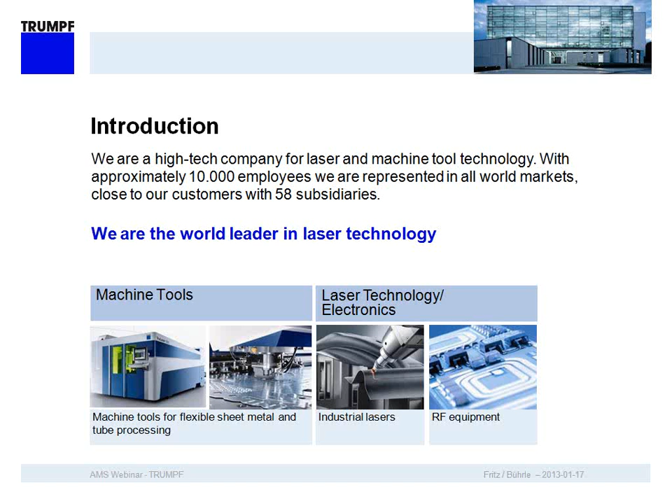In terms of diode laser power, we are the biggest producer, and we are the only company with this high product portfolio with, for example, micro lasers, pulsed lasers, marking lasers, high power lasers, low power lasers, and so on. Also we are the only manufacturer, which will be seen in the presentation, for 3D cutting machines, and we are the only manufacturer doing the same machine and laser source at the same time. We also have some other business fields which is not on that slide, such as medicine technology and hand tools, but we just focused here on our main activities.

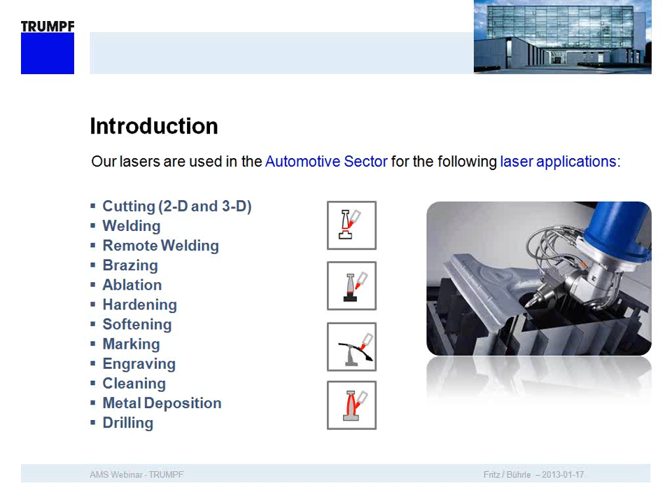Going to the automotive sector, which will touch our hot forming topic today, we have different laser applications. I would like to outline the majority of these applications our customers are using. Our lasers mainly for cutting, 2D, 3D, welding, remote welding, laser brazing, which is a very common application, ablation, which we will talk about today in this presentation, laser hardening, softening, marking and engraving, cleaning of edges, metal depositioning, and of course drilling in injectors and so on.

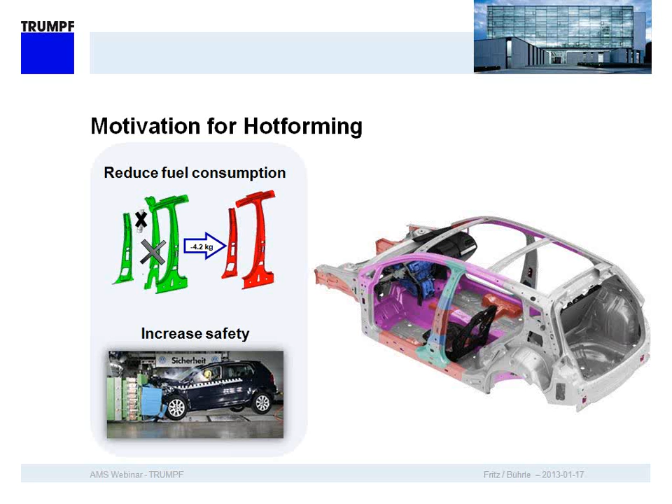So going to the hot forming topic, what is the main motivation of our customers, of the OEMs, to use hot forming parts? I think I don't have to introduce and explain hot forming, but the main motivations for it are to reduce weight, and that means reduce fuel consumption in the cars. The second motivation, of course, is to increase the safety of the passengers in the cars. On the right-hand side, we see a state-of-the-art car model, and in color we can see hot forming parts used in a body-in-white frame. Their customers use around 20 to 30% of their car body using already hot form parts. So it's really a mega trend, and state-of-the-art cars are increasingly using this kind of parts in their models.

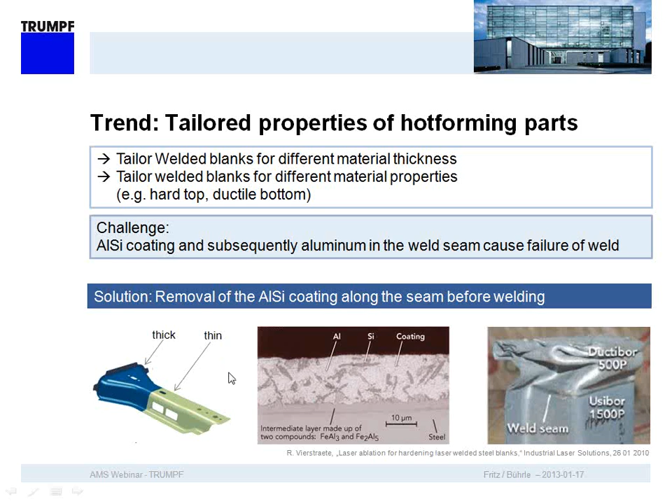So the process requirements we got from our customers is to remove 10 to 20 or even 30 micron of this aluminum silicium coating, and only along the welding edge of the blank. That means you cannot remove too much because of corrosion issues, and also the process must be very stable, so it must be adjustable to take off the thickness at different heights.

They don't want to change the property of the base material - that means we cannot bring heat into the material. The removable width is typically 1 to 2 millimeters, depending on the welding seam thickness, the laser source, and the thickness of the material they weld. Typically it's 1 to 2 millimeters at the edge.

Also a requirement could be the simultaneous removal on two sides of the blank - that means you have to take off the layer on the upper side and then the bottom side, just to make sure that no aluminum goes into the welding seam. A typical welding speed in tailored welded blank machines is around 6 to 8 meters per minute, so the resulting linear removal speed should be around 12 meters - since we have to take off both the top and bottom side - overall 12 meters, to not create a bottleneck in the process.

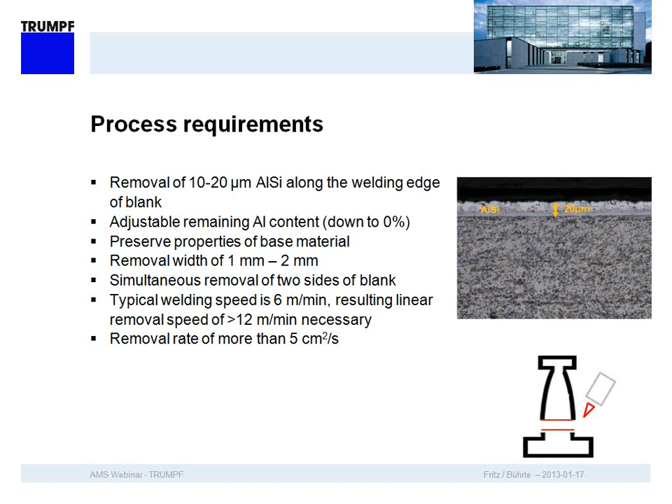So what we did, we used different setups. We made many tests in our laboratory here, and we wanted to understand this process to be able to transmit it to our customers and make a good technical and industrial application out of it. So we started from scratch with a typical round fiber, and also a square fiber, a rectangular fiber, and we created with our optical setup in our head a line focus. We really tried many parameters, but basically we used these 4 different optical setups.

So on the left hand side we see just symbolically the fibers, and on the right hand side we see an ablation spot. For example, to get a straight line going in that direction, we really have to make a lot of overlapping pulses to remove the layer, and the same we do here - we really played with these different overlappings of the layers.

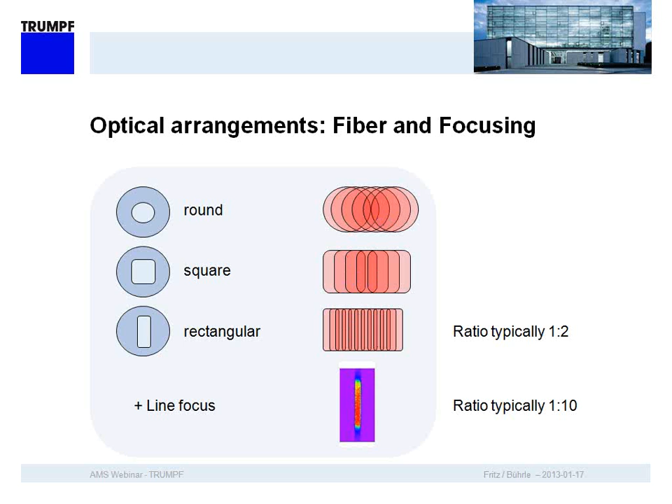For the laser source, we used our nanosecond laser from the TruMicro series, which is a very high productive laser source with high laser quality. That means we can use small fiber with small diameters, which helps us in terms of optical arrangement in the optic, so we could really play in different optical arrangements.

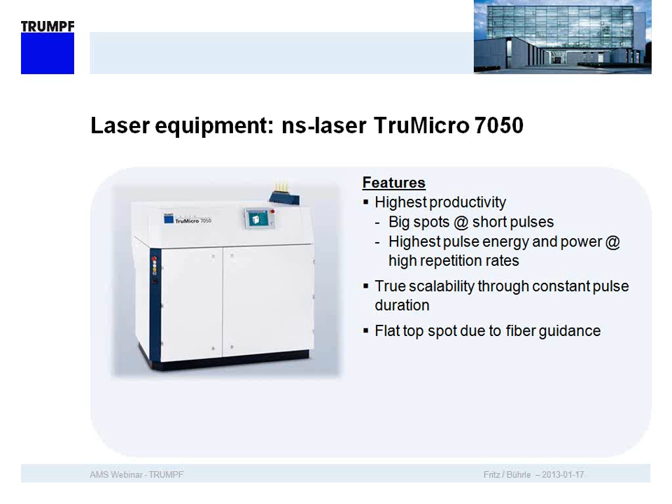Very interesting about that laser is it has a very high pulse energy power with a high repetition rate, very stable in the pulse, which helps in that removal of this very thin layer. And we can go to very high frequencies, which we'll explain now—very important in this kind of application.

I prepared two small videos just to see how this is working. First, we will start with a high-speed camera where we can see very accurate films, very slow motion, to see how every single pulse hits the surface and removes this aluminum silicon layer. I will just step out and go to the videos.

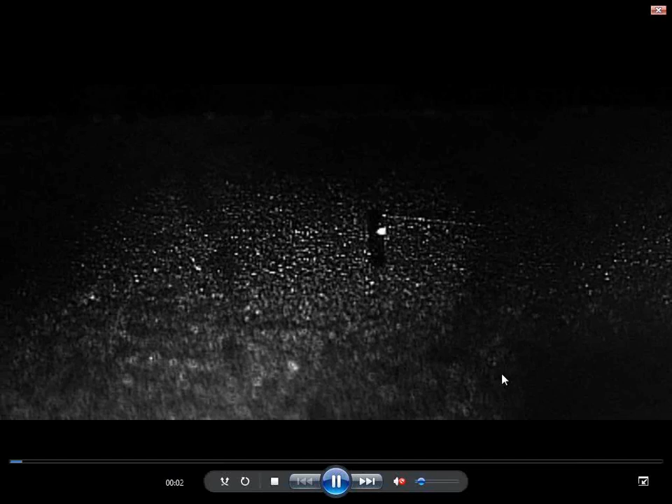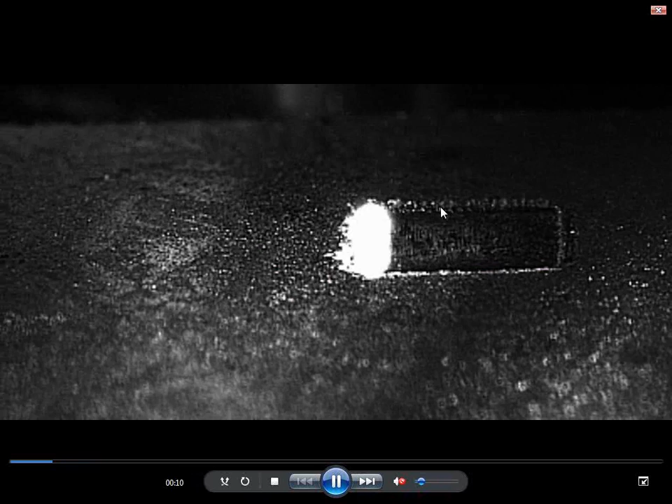Now we can see 1 millimeter width—so this is 1 millimeter, and these are the single pulses. We're blowing compressed air from the right side, going in the direction of the removal. And below is the clean high-strength steel. So if this would be on an edge, we could now weld this part without having the aluminum in the layer.

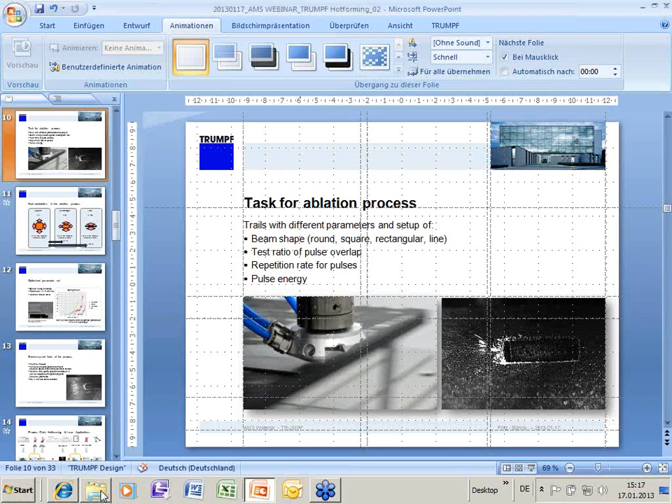Now in real time, this looks like—here in this video, this is in our lab on a short high-strength steel blank. Real time is 28 meters per minute, which is really a little revolution in this application, I would say. So let's go back to the presentation.

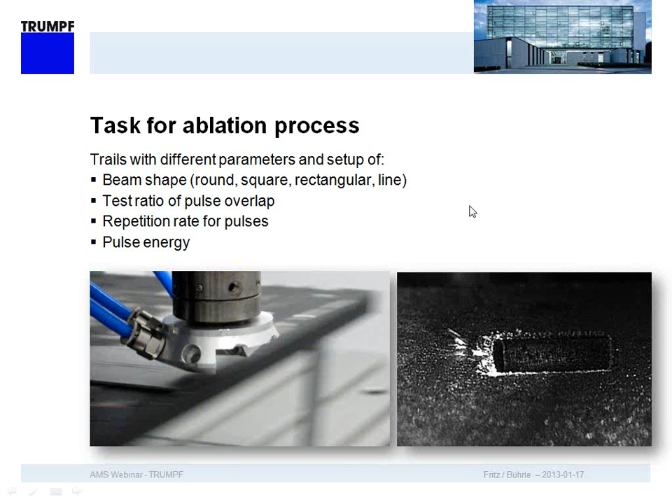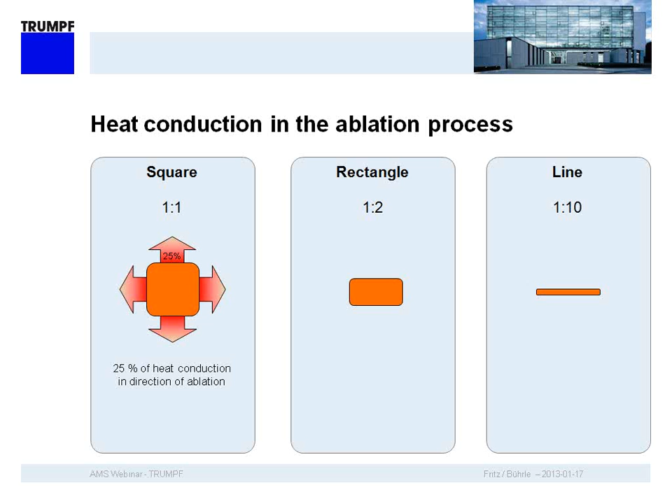So we did these different trials with different beam shapes, as I explained—round, square, rectangular, and so on—and different overlaps. What is very interesting is if we use a square spot, going in that direction for the ablation, we can only use about 25% of the heat conduction for the ablation. That means the rest is just lost to the side edges of the spot.

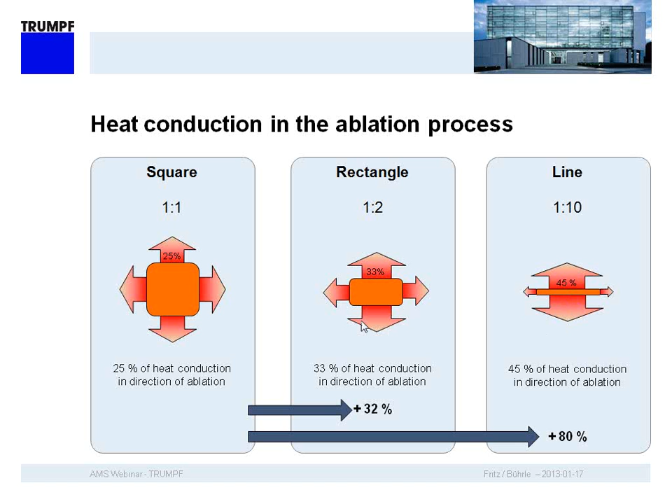We did the same with a rectangle spot and with a line spot, and it was very interesting to see that we had a very high possibility and power to go in that direction. But what we do is use the same energy on a smaller surface. That means you also have to do overlaps, and you are bringing much more energy per square millimeter surface. To not slow down the process, because you have a much smaller surface, you have to increase frequency, and it was interesting that our laser is the only one who can really do that job.

So on that comparison sheet, we did many trials. I just want to show it in this graph, and the result with that line laser was outstanding.

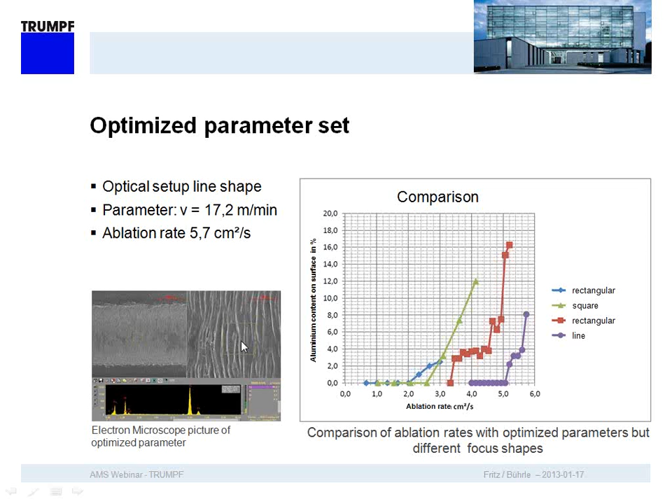So we did this optical setup with the line shape. We had very good parameters, around 17 meters per minute of ablation rate. And here we can see a little photo from an electron microscope, showing how clean the surface gets with the optimized parameter set.

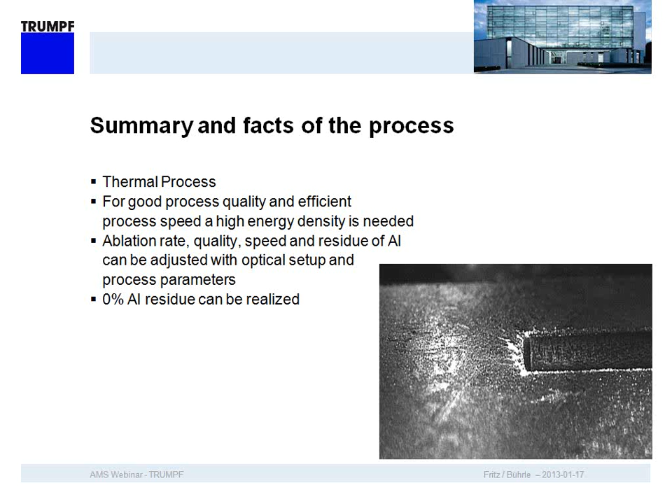So in summary: of course it's a thermal process, but the nanosecond pulse is so short that it's almost a cold ablation. It's very efficient because we can meet the requirements from our customers. We're not creating a bottleneck compared to the welding, and the quality, speed, and residue of the aluminum is very nice for industrial application. It allows very nice adjustment—to remove it at 100% or adjust it to a certain percentage if somebody wants to have an aluminum short layer on top.

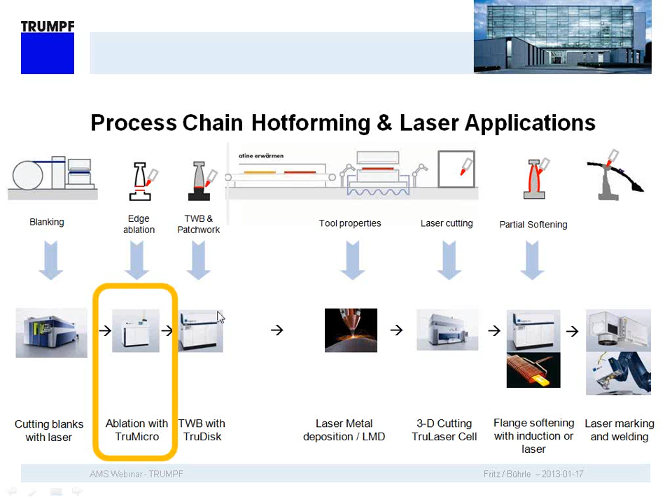Hello everybody, this is now Michael Fritz, and I will be talking about the other topic in the presentation, the cutting of the hot stamping parts.

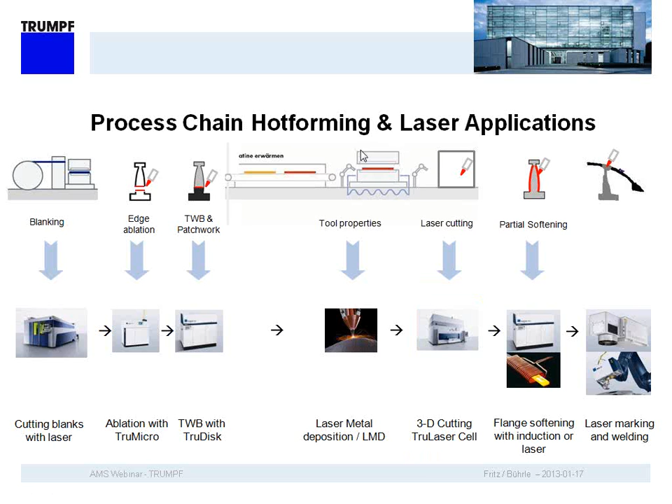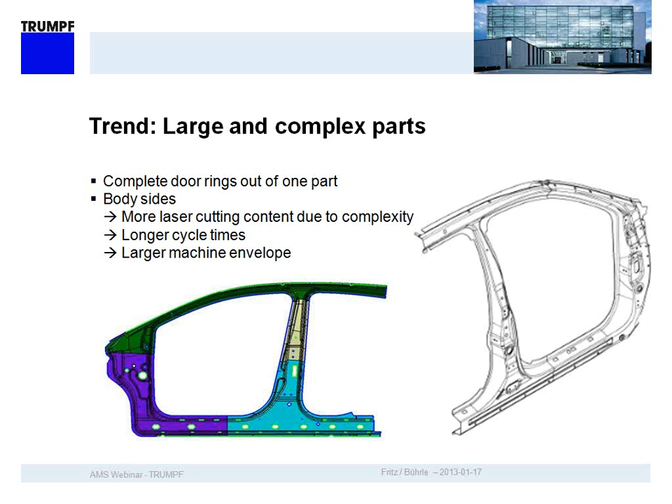I also want to point out some trends that we see in the industry. One is that we see a lot of, or a few, large parts coming from our customers. That means complete door rings, side panels, body sides. Those parts typically require more laser cutting, so they have quite high complexity. They also require longer cycle times on the machine, and a very large work envelope to position them and do the cutting process.

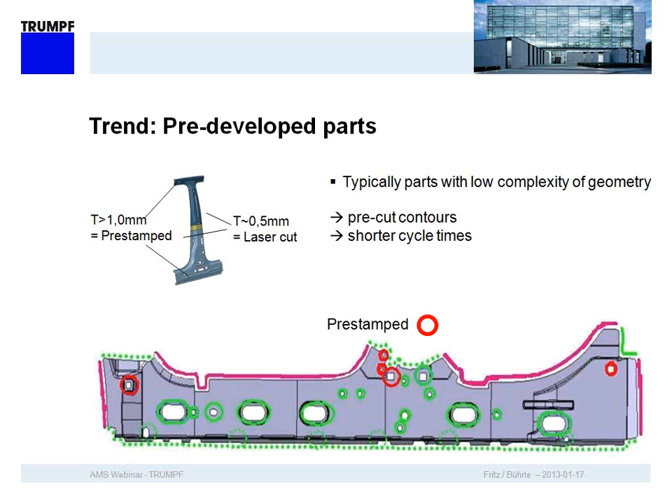The other trend goes pretty much in the other direction. We see parts with pre-developed blanks, meaning a lot of the contour is already pre-trimmed in the blanking press. Another trend is cutting in the die, or hot cutting process, which also reduces the content of laser cutting. With those parts we see a pretty short cycle time, coming down to the range of 20 to 30 seconds.

So why do we do laser cutting instead of the conventional hard trimming press or trimming in the die? Because we saw there's an extremely high wear of the tooling, so a lot of cost involved to repair the tools and keep them running. There's downtime, and pretty high forces required, meaning big presses which also cost a lot of money. And also micro cracking when mechanically cutting edges of already hot stamped components.

With the laser on the other side, we don't have any wear on the tooling, we don't have deformation on the part, and we can also have accessibility with our laser heads into very complex contours and very complex shapes.

The two typical laser processes used for these materials are nitrogen cutting as a cutting gas, but as a newer trend, since a few years, most of our customers have also switched over to compressed air cutting, just because of the savings in processing cost. The cut speed and cut quality are pretty much the same. The difference is that you have a shiny edge with nitrogen, and a little bit of discoloration with air.

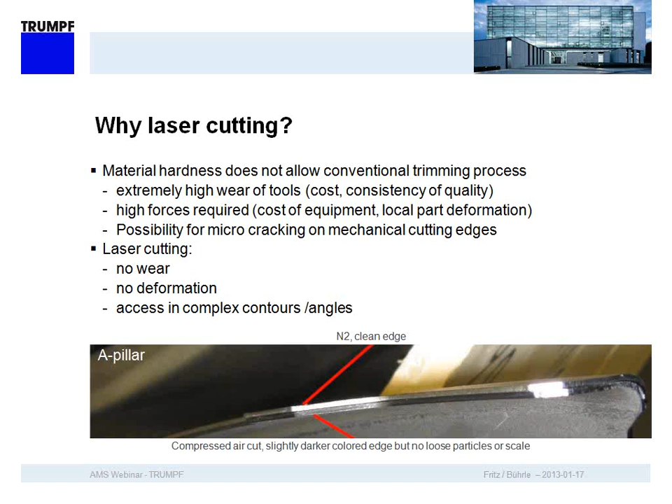So also, why do we use 5-axis machines? Well, we see there is a need for very high dynamic motion. A 5-axis machine is pretty much a Cartesian coordinate system where we have very stiff and rigid axes, so we can follow the program path very accurately, and we don't need to compensate for any slack in the axis.

Make a program, put the part on the machine, and cut it right away with maybe just a few adjustments. Also, if adjustments are necessary in the process, which is always the case, that holes or contours need to be shifted and moved, this can also be done very easily on the machine.

We have the laser cable thoroughly integrated into the machine, a fairly large work envelope, and a very high installation base of those machines. I don't have the number right on top of my head, but it goes into the hundreds. As a result, we have a very high output, and everything comes down to being able to achieve a very low cost per part.

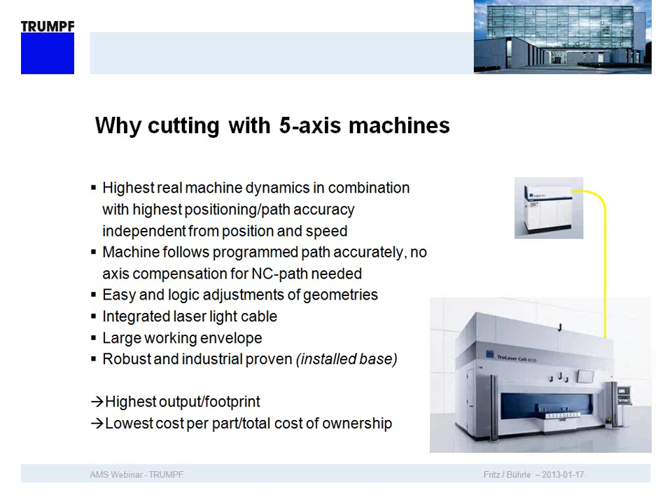As a further introduction, I want to show the machine also in a video real briefly, so I have to exit the screen. I think that is for a better connection.

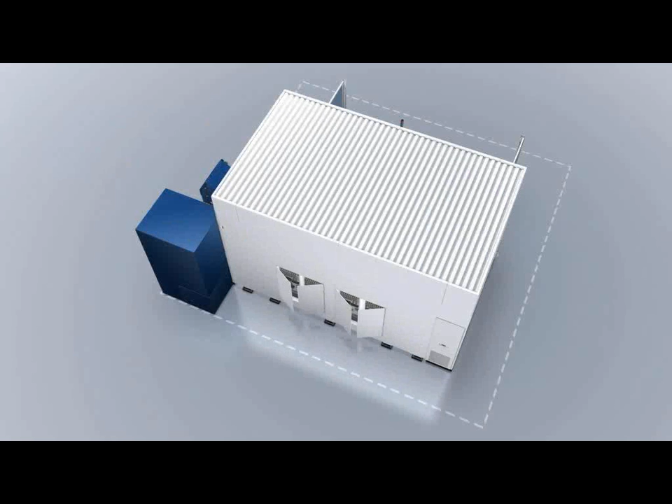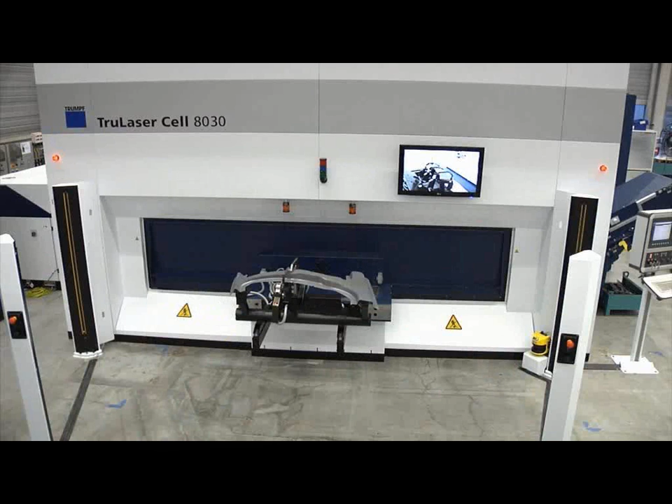So that's the product video. What you see here, with the TruLaser Cell 8030, we have greatly reduced the footprint of the overall installation. We have a safety and loading area in front of the machine that allows accessibility to the loading position from three sides, which makes material logistics very easy to handle. The rotation table puts the part into the work envelope where we do the cutting.

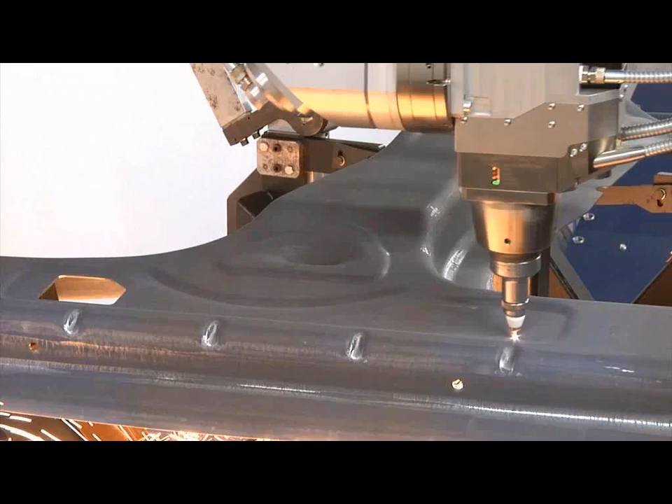We have features, which I will later explain a little bit more in depth, which is the observe line, a slug detection feature.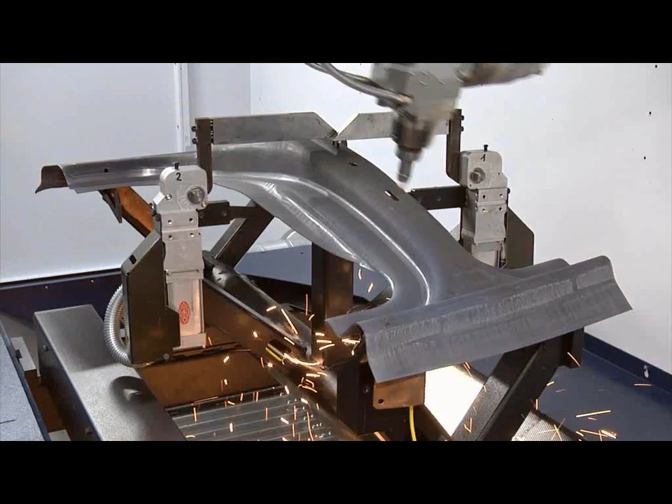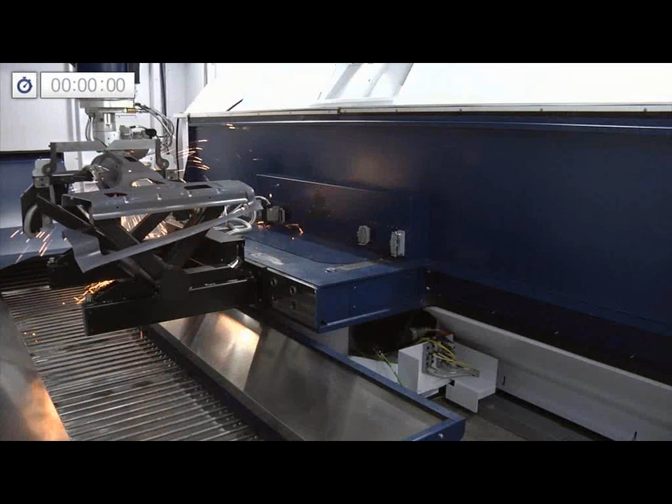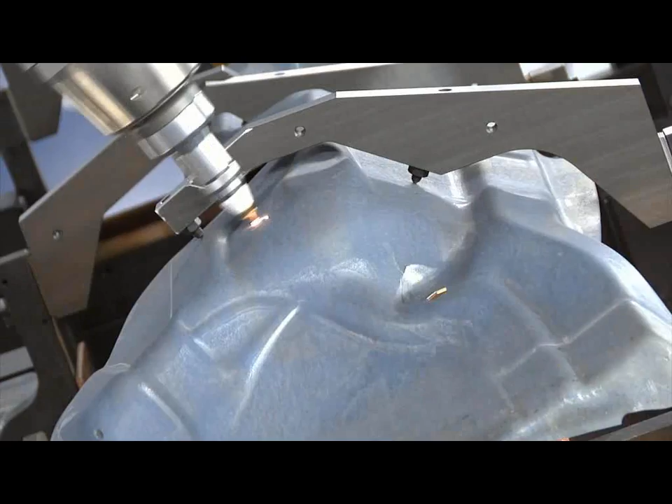And of course, what you can hopefully see well in the screen presentation, is the very high agility of the machine and the changeover time from part to part shown here. So from turning the laser off and putting the head away to a safe position, putting a new part into the workstation, approaching the part again, and igniting the beam - that's pretty much the time from part to part. It takes right about 5 seconds here. If we only look at the rotation time, it's a little bit over 2 seconds, roughly 2.5 seconds.

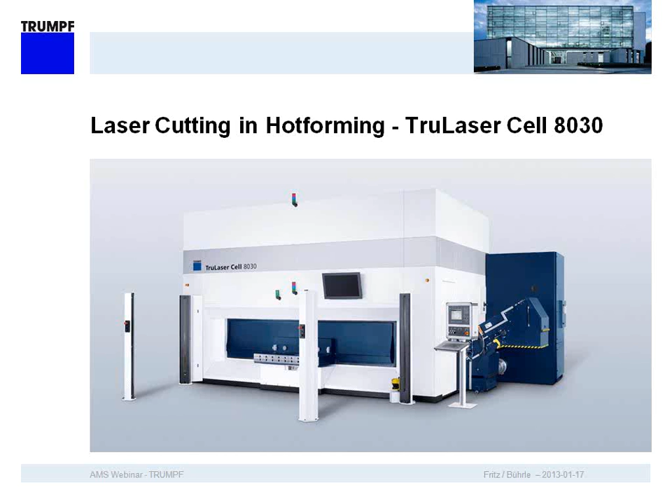This should have served as an introduction of the equipment that we have especially developed for this kind of application, because we saw this market is really growing a lot, and we also saw the need to have a special machine tailored for this kind of application.

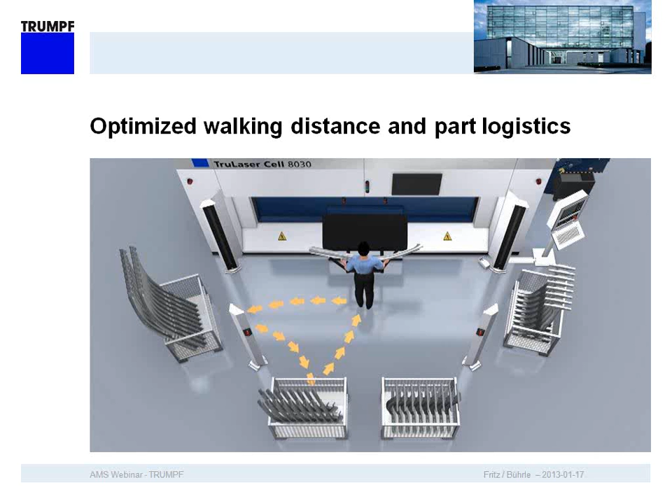Coming back to a few topics here, again having a screenshot of the loading area where you can see how you can place your bins and crates around the machine to have a very good machine logistics or part logistics, to get parts in and out.

When I come to a function of the machine called FastLine, this is a function that allows piercing on the fly. At the end, what it does is reduce the cycle time. When you look at the left picture here, that's the normal sequence of piercing. The laser head comes to a pierce position, this is a hole cut into the sheet. Then you ignite the laser, start cutting the hole, and go up to the next hole.

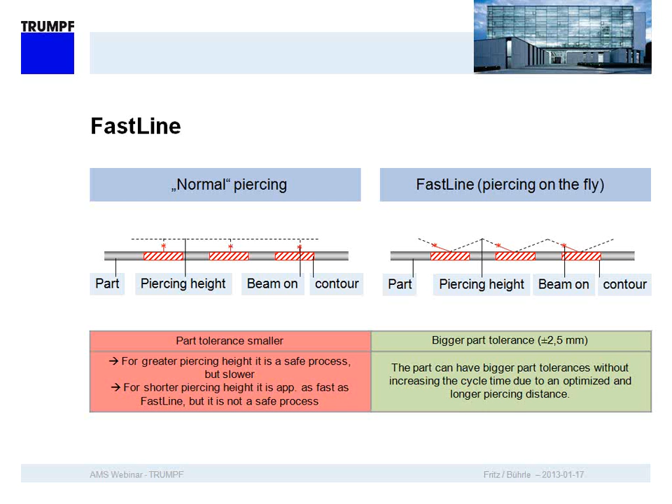With our piercing on the fly, or FastLine function, while we approach the hole we already ignite the beam and also ignite the distance control. So we already have very high energy density on the part when we reach the piercing position. That means we can start cutting this hole much faster. What we save is roughly 200 to 250 milliseconds each time we do this piercing. So if you count a typical part with maybe 20 holes, you can do the math.

Another very unique feature built into the machine is ObserveLine. This is what we use to deliver better quality, or to make quality control of this machine. How this function works - if you paid attention to the video it was just a very short sequence - is that the laser emits a very short pulse after we have cut a geometry hole. This laser pulse goes through the cutting optic to the position where a hole is supposed to be.

Typically the slug has fallen out of this hole and nothing happens. But just in case a slug gets stuck in a hole, which can always happen, then some of the light is reflected through the fiber cable back to the resonator, where we have mounted a sensor that you see indicated here in blue. This sensor gives an error message or error signal, and the part can be treated accordingly and taken out of the process.

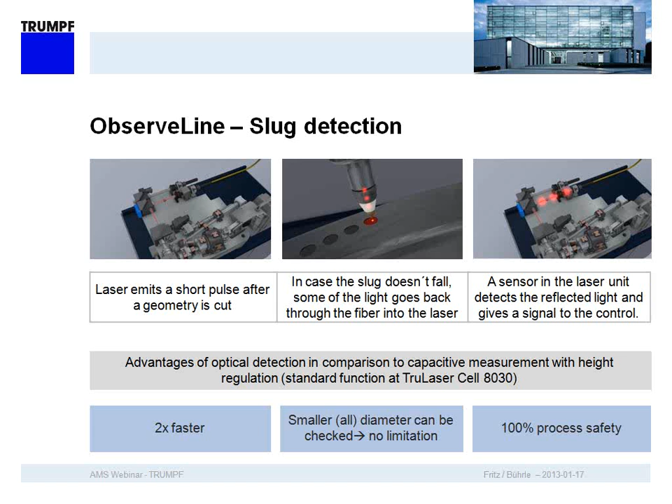We can do the same thing with our distance control, which is a capacitive sensing system. But it turned out that this optical system is way faster compared to capacitive fields, and it can also detect cutouts and holes which are much smaller. So we can achieve very high process safety in this case.

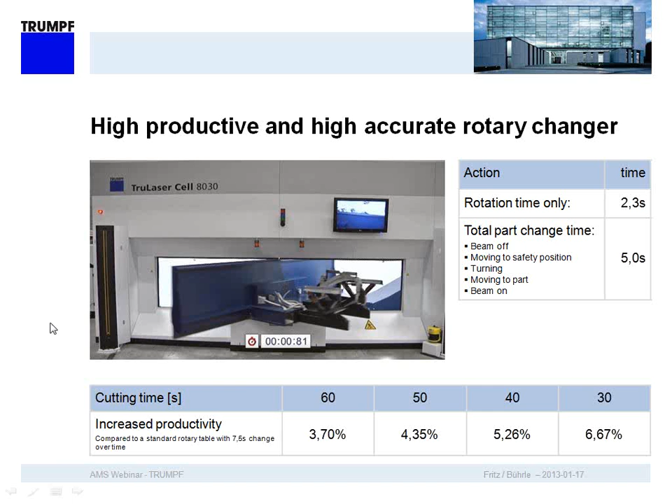The benchmark of 7.5 is because these are typically the available rotary tables found in the industry, and previous generations of our machines also had this 7.5 second changeover time. We really wanted to set the benchmark, so we looked into a lot of details of the machine to improve it and make it more productive.

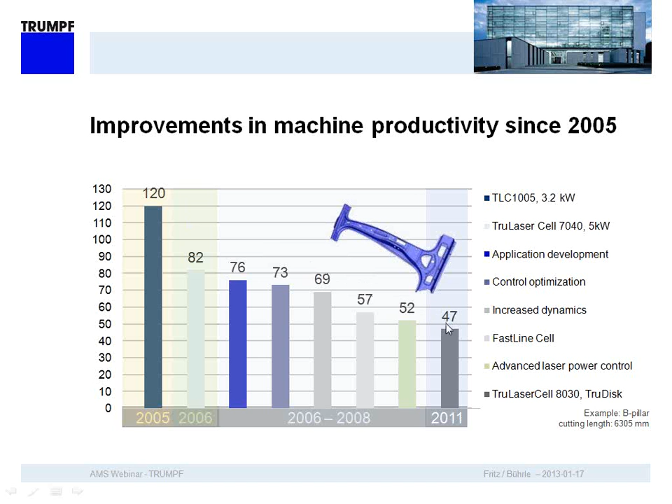With our machine generation from back in 2005, it took 120 seconds to completely process the part. By introducing new generations of machines, new laser technologies, and packages that increased the dynamics of the machine, we brought this cycle time down to nowadays about 47 seconds. So we really shortened the cycle time a lot.

This graph shows the same thing again up to this point. Bringing down the cycle time of the parts is due partly to the increased dynamics of the machine, but also due to the pre-development of blanks and lower laser cutting content compared to previous years that we have seen in the industry.

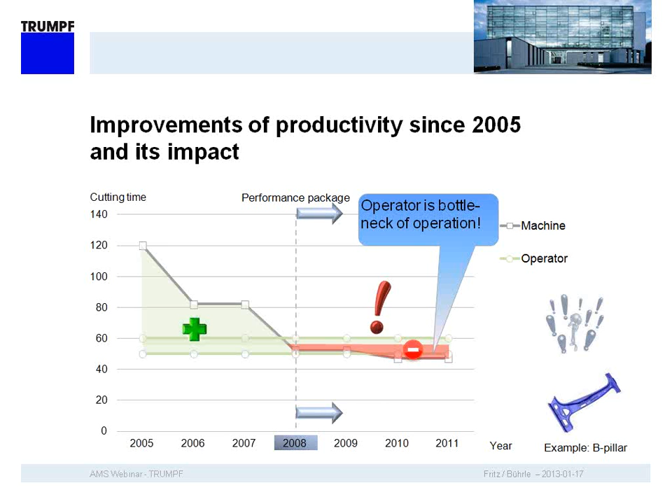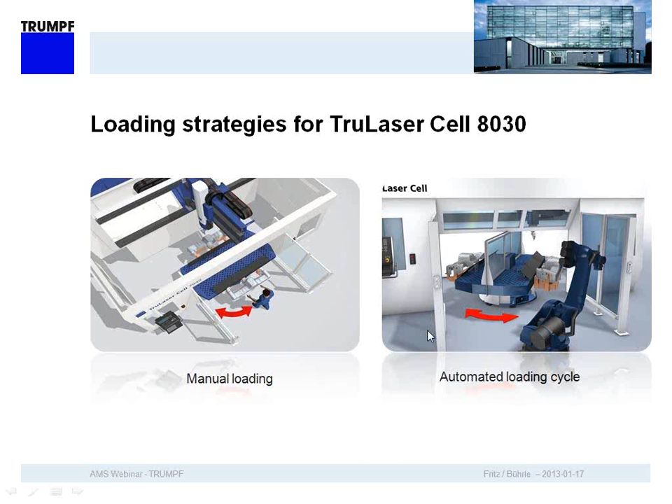In addition to the loading strategy of loading the machine manually, which is mostly used in the industry, there's also automation available now. The machine offers an interface for all the robots pretty much, and we also have developed a solution to load the machine automatically.

The sequence of automated loading looks a bit like this. This is the situation we find at a lot of our customers: parts are delivered in boxes, crates or bundles, and within those crates sometimes they're stacked, laying down, with cardboard in between. It's pretty much an undefined position and location, so this is really difficult for automation.

For automation, you need the parts presented to the robot with an accuracy of about 50 millimeters. This can be achieved by stacking the parts into a rack. In many plants these kinds of racks are already available, and parts are handled in the racks. But an accuracy of plus minus 50 millimeters is still not good enough to locate the part accurately, to grip it with the gripper hand of the robot and put it into the machine. So we need to achieve a better, higher accuracy.

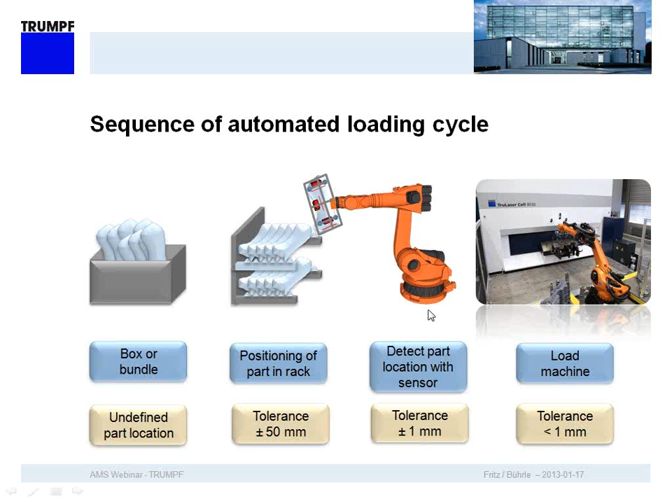With the data gathered here, we correct the position of the robot gripper arm. The robot will then check again to make sure it's in the right position, then take the part and load it into the machine, doing this with an accuracy of about 1 millimeter. If we achieve this accuracy, we can make sure the part in the fixture is located accurately and can be processed from there on within the machine.

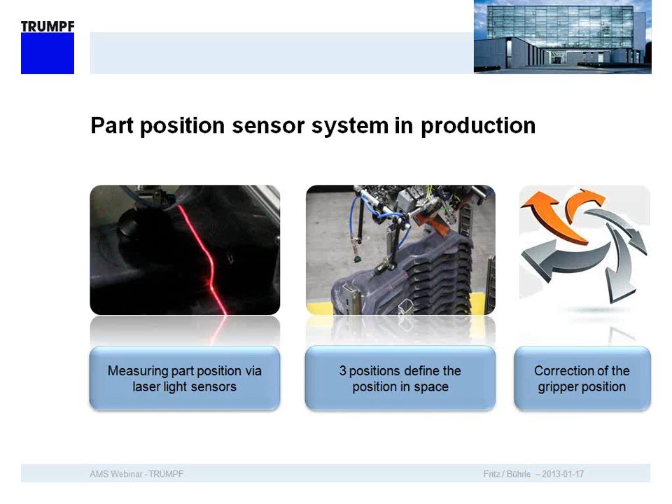Better than explaining everything is, of course, showing a movie here.

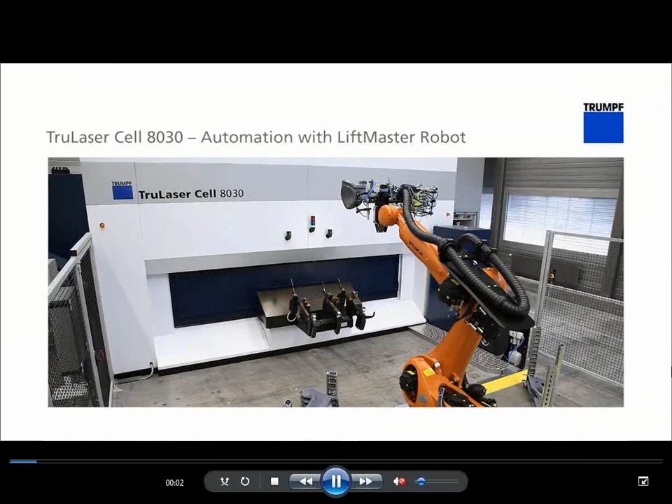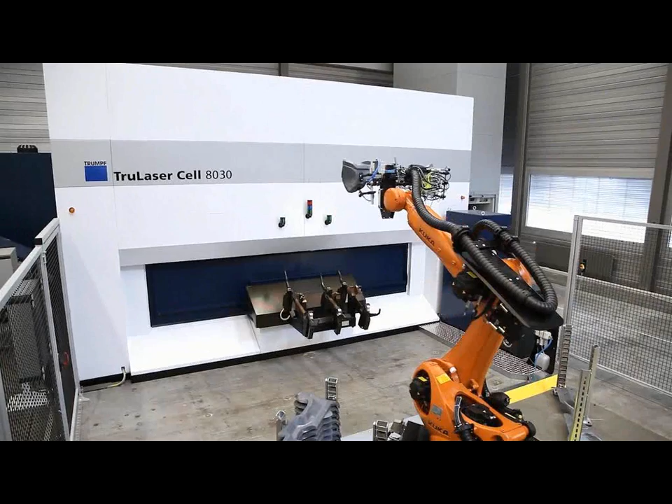This is the cell that we have equipped with a robotic gripper system. When the robot goes to the part, you can, for a short moment, see the red lines on 3 positions. The robot is adjusting its position, getting the part, and loading it onto the fixture.

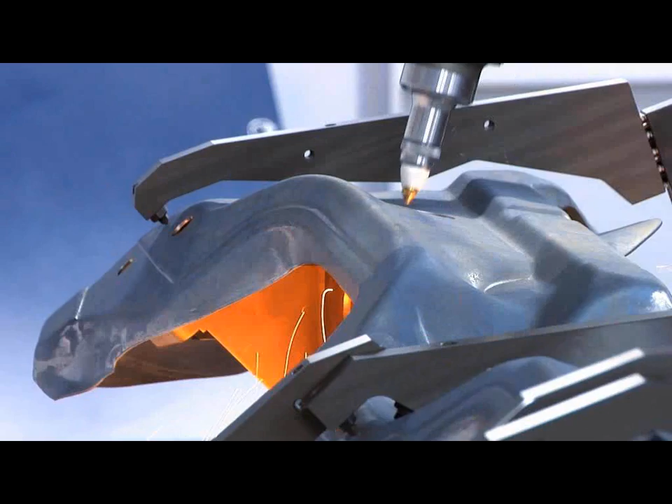The robot loads the part on the fixture very accurately every time. The difference with an operator is that operators put the part roughly into position and later give it a push, and what we see is that the locators of the fixtures wear off a lot quicker.

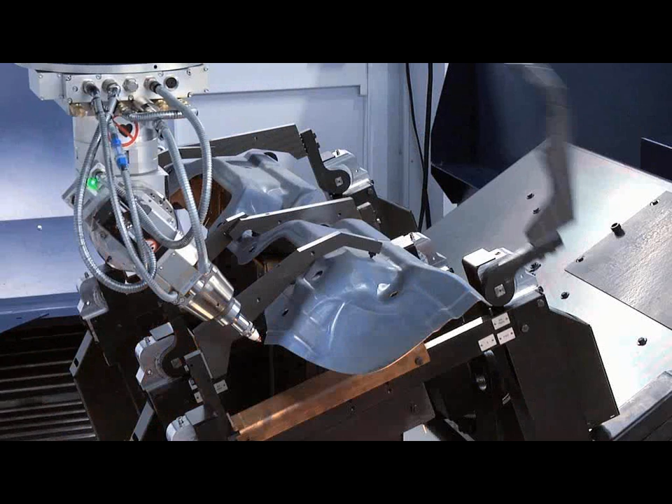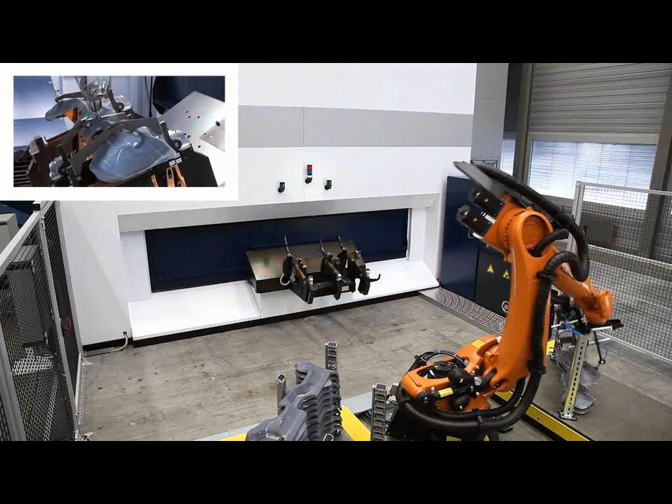At the same time, the machine in the enclosure is doing the processing while the robot is loading new parts again. In case there would be an erroneous part coming out of the machine, detected by an ObserveLine, the robot can also take care of it and get this part out of the processing sequence.

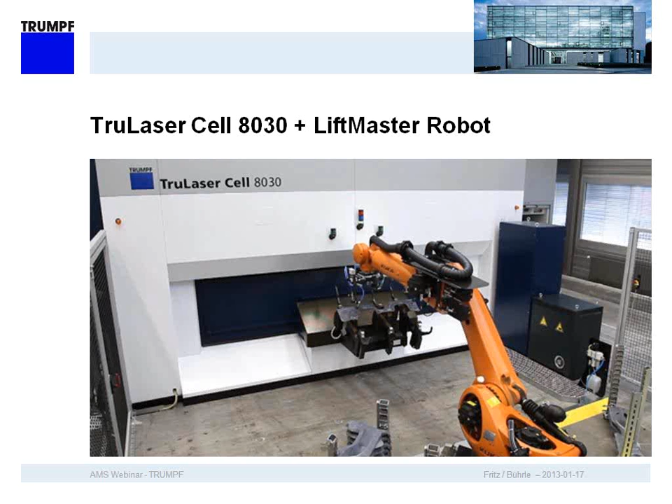I will also summarize the advantages we see using a robot for loading the machine. We call our solution LiftMaster Robot.

What we see here is that there are fewer operators involved in the complete process. We can share one operator over many machines because the robot really takes care of the loading and unloading, so we can lower the hourly rate for the machine.

What was also seen in production is a very high continuity in the process. That means the robot puts the parts in very steadily. It doesn't make any breaks or stoppages, and the signal exchanges happen very quickly, so there is reduced idle time.

We also see the accuracy of putting the part on the fixture helps to reduce wear on the fixture. Anytime you give the part a push, you get abrasion, wearing off the pins where the part is located. We can also take care of bad parts detected by the ObserveLine and take them out of the process.

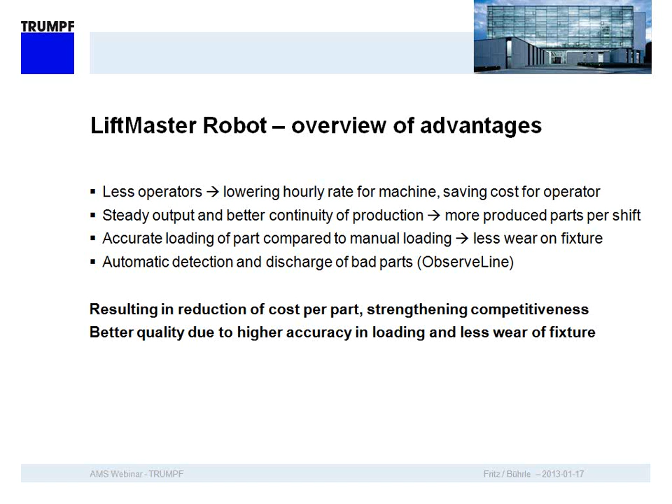So all of this, of course, results in the reduction of cost per part, which I think is the goal of everybody doing this kind of process. And we can also deliver a higher quality of the part because the part is positioned in the fixture very accurately anytime we load and unload a part.